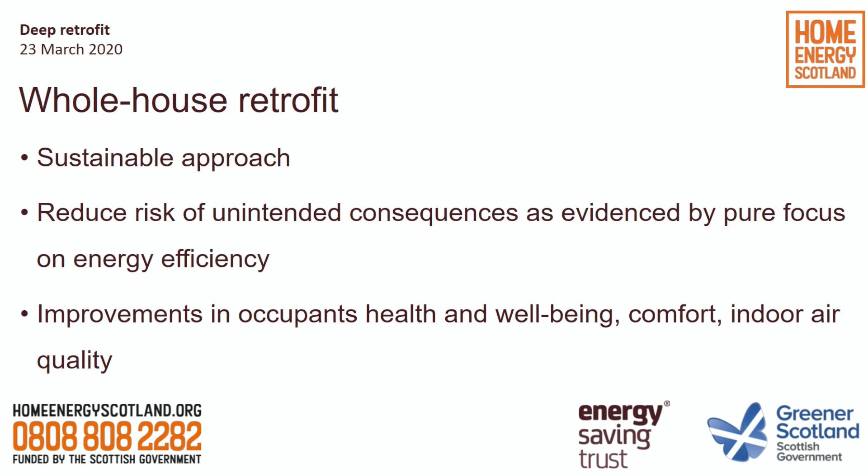...physics of that building - things like insulation, ventilation, indoor air quality, acoustics, lighting, all sorts of things come into play. It's about trying to think about as many of those things as possible when pulling together a plan for retrofitting your property, all whilst having that overarching aim of reducing energy demand.

It's an enormous feat, and in some properties it's more possible than in others, but this is a category of work that really needs to be considered, given the very ambitious target set by the Scottish Government of net zero by 2045.

They are currently preparing a whole house retrofit design guidance for Renfrewshire Council and their existing cross wall housing stock. That Renfrewshire Council project's been awarded funds from the Department of Business, Energy and Industrial Strategy, or BEIS, through their whole house retrofit competition. It's a fantastic project, delivering a Fabric First retrofit programme to, I think, 75 properties in 3 different areas located in and around Paisley.

Barbara will be talking about that cross wall properties project, their performance targets and compliance, and I think the aim is to refurbish them to EnerPHit standards.

If you're not aware what EnerPHit is, you might have heard of Passivhaus - really strict standards with very, very low energy demand. That's a standard that's been adjusted for retrofit projects and termed EnerPHit standards, because some of the qualities of Passivhaus would just be impossible in all retrofit designs, since you've got things you can't change or adjust to make it possible to achieve Passivhaus.

But by no means does that make EnerPHit easy to achieve. It's definitely one of the most stringent standards available for deep energy retrofits.

If I could quickly introduce our second speaker - following Barbara, I'll introduce Julio Bros-Williamson. He is a lecturer in architectural technology and building performance at Edinburgh Napier University School of Engineering and the Built Environment. He's an architect graduate from the School of Architecture at Marista University in Mexico City, and holds an MSc in Energy Efficient Building from Oxford Brookes University.

He's been a chartered Mexican architect since 2003, and he'll chat to us today about a particular research project he's been working on, slightly outside of his work at Edinburgh Napier. He's also a director at the Scottish Ecological Design Association, where most recently he's been contributing towards the research section of the association, and responding to government consultations and sourcing research funded projects.

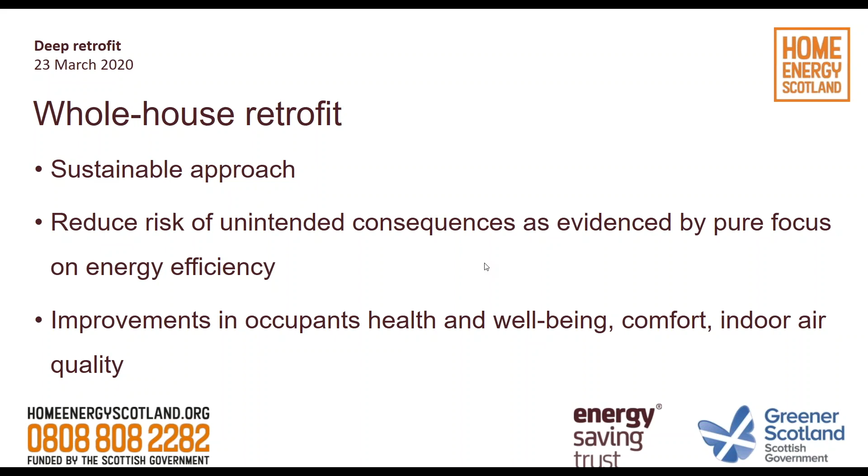I'm going to structure my presentation in 4 main sections. The first one gives you an introduction to what our office does and what HabLab means for the office. Secondly, I'm going to give you a general context of the retrofit industry, what we have been finding in our building performance evaluation consultancy projects. Thirdly, I'm going to briefly introduce you to the PAS 2035 standard. Many of you probably heard about it, but it's now a relevant standard for deep retrofit, and I'm briefly going to talk about it. And lastly, I'm going to go through the case study that Joanne just mentioned.

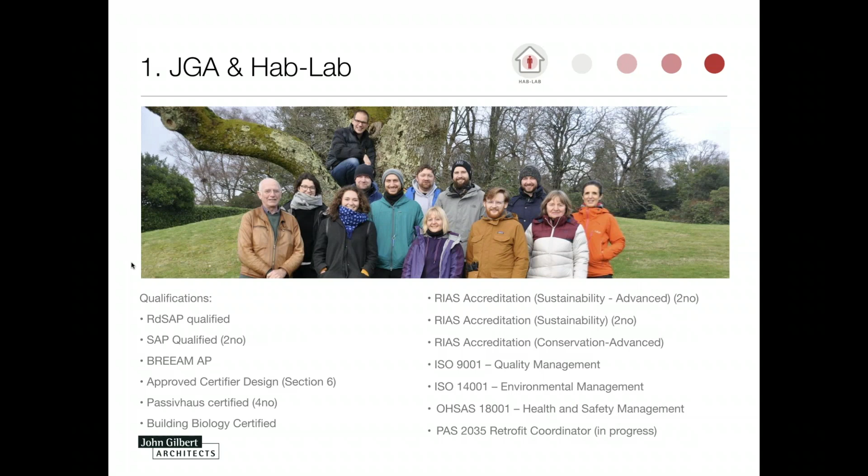So this is what we generally work on: the office works on 4 main fields. The first one is conservation, retrofit, strategy and master plans, and sustainable architecture. And the fourth one is HabLab, which is now 6 years old.

We have been focusing on the evaluation of buildings and how they really perform in practice and in use. It's a way we see as a new way of engaging with the industry, providing feedback loops not only to our office but to clients and the whole industry.

So what we do is we try to make building performance evaluation accessible to the industry, because building performance evaluation has been around for many years, but it has been more limited to universities, which is great. But what we try to do is just implement it and give it a commercial use, and offer it to our different clients.

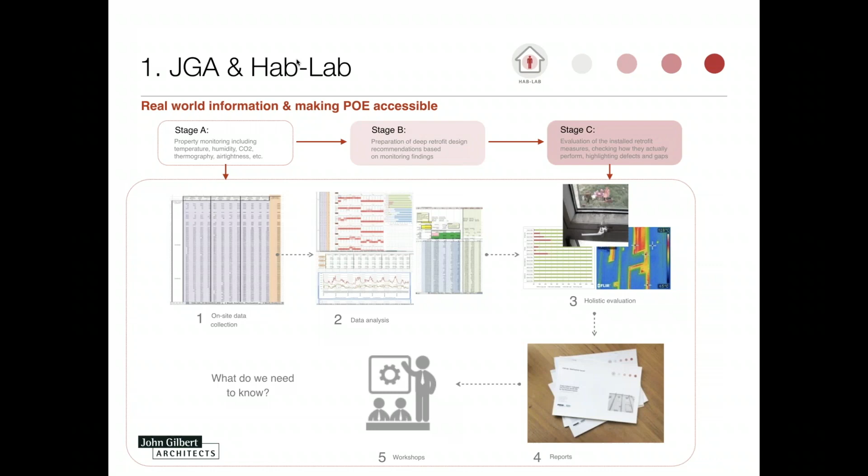On our second stage, we base retrofit recommendations on what we found on site and the tests and evaluations we conducted in the first stage. And in a third stage, after we install the retrofit recommendations, we evaluate them again to understand how well they performed and to identify defects, to improve the process for our next projects.

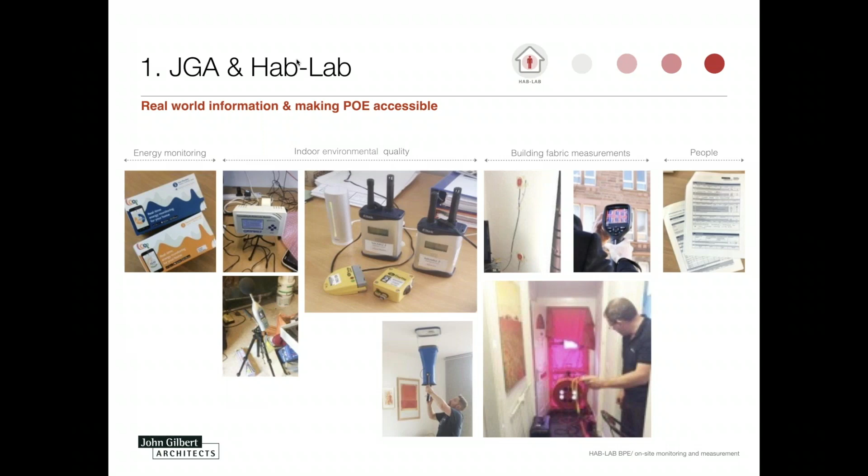So we have a good idea of how existing buildings perform and also how retrofit measures have been installed. Firstly, retrofit works generally reduce energy consumption, but not as much as predicted. This shows there is a huge unfulfilled potential, and there are many small things we will go through in the next slides to identify why this is happening.

Secondly, in terms of comfort and human health, houses are a bit warmer and more airtight due to the retrofit works, but this also exacerbates health risks associated with indoor air pollution and moisture. That happens mainly because retrofit projects are not designed holistically, and this problem can be avoided. These are problems generally related to condensation, mold growth, poor indoor air quality, and overheating.

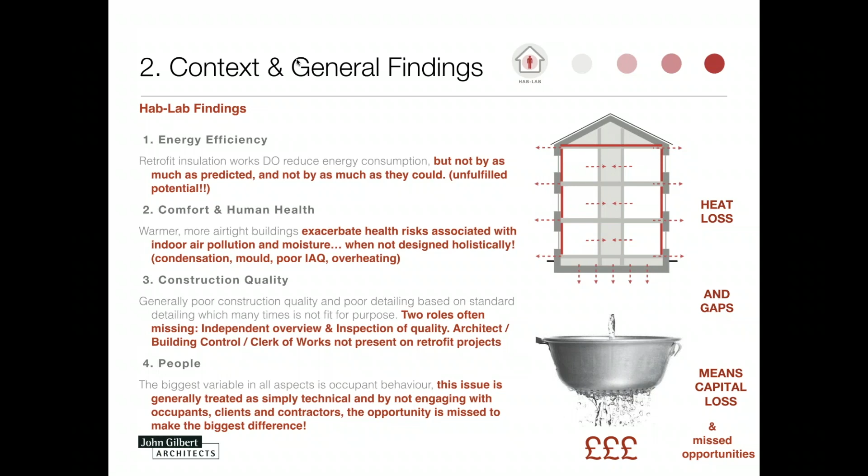In a fourth point, and this is a very important issue for us, we consider that people are the biggest variable in all aspects, and this variable is many times underestimated. This means retrofit works are focused many times on technical issues, and are not really linked to how people are going to use their homes or how they feel. This is for us a missed opportunity.

So all the issues that I mentioned before can be summarized as what is generally called the performance gap. This is mainly the gap between predicted and as-built performance. So all that has been specified in theory, all the calculations and how drawings have been prepared, are not actually happening on site.

Many studies have confirmed that this gap in the UK is quite big and is creating many new problems, introducing new issues. Previous studies, not only based on our findings but also on many other studies published in the UK, suggest and confirm that this performance gap is due to a lack of understanding of how existing buildings actually work.

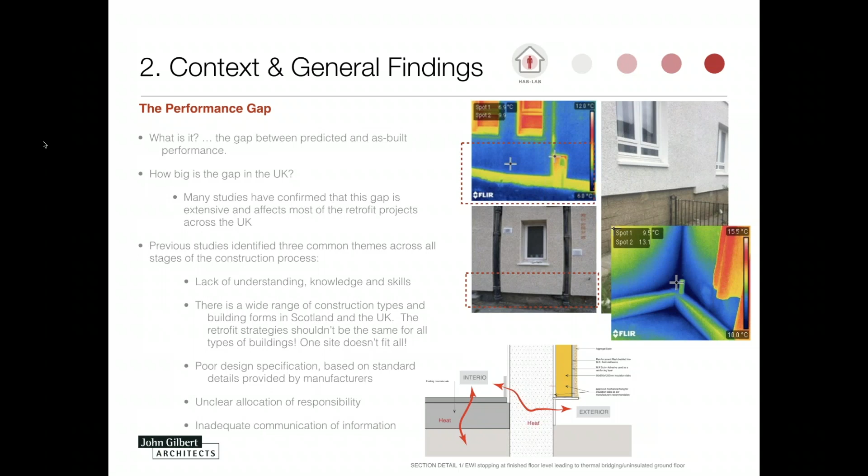So just to give you a general context, and this is also what Joanne was mentioning before, there are several targets that the government has been setting for housing associations and local authorities to meet. Some of them are more ambitious than others.

But the important thing is that this highlights the importance of trying to minimize the performance gap and trying to conduct retrofit as deep as possible. There are standards such as EESSH 1 and EESSH 2 that require social housing to meet EPC Band B by December 2032, which is for many of our clients an ambitious target.

And in the context of what are requirements for retrofit, up to now, beside building regulations, the only requirement was PAS 2030, which is linked to specific funding requirements. But there are not many retrofit standards for Scotland and the UK for our clients to follow. So that's one of the challenging parts.

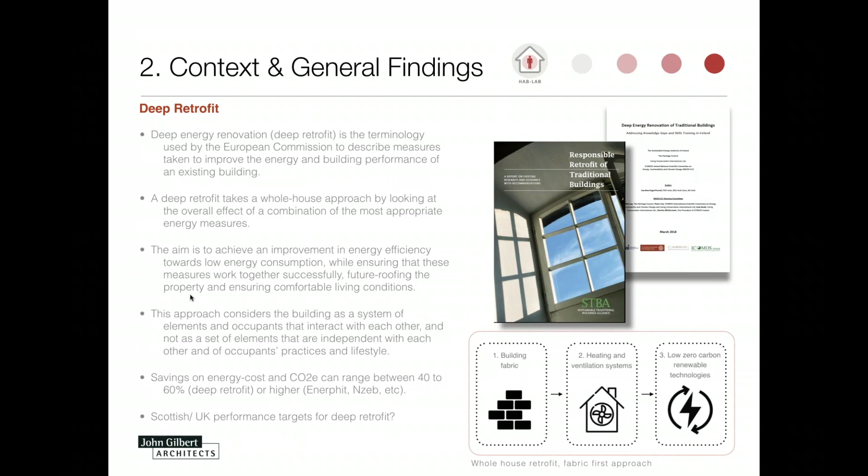As I was saying before, there are no clear or set performance targets for Scottish deep retrofit right now. There are international targets such as EnerPHit, the Passivhaus retrofit standard, and I'm going to talk about it later because that's the case study I'm going to describe in the following slides.

In that context, PAS 2035 provides a specification and best practice guidance for energy retrofit works for domestic buildings in the UK. It has been released by the British Standards Institution in July 2019, so it's relatively new.

Some funding schemes already require it for specific funding streams, for example ECO, but it's not a compulsory standard right now for most retrofit projects.

It provides a series of guidance on technical aspects and on the process in general, specifying the right retrofit measures in a holistic way, assessing the interaction between measures, and assessing ventilation, which many times isn't considered in retrofit works because it's generally only focused on energy efficiency aspects.

Assigning a project manager is compulsory if one wants to comply with PAS 2035, and that's the retrofit coordinator. It's the project manager of a retrofit project, ensuring appropriate qualifications and skills by providing training and qualifications.

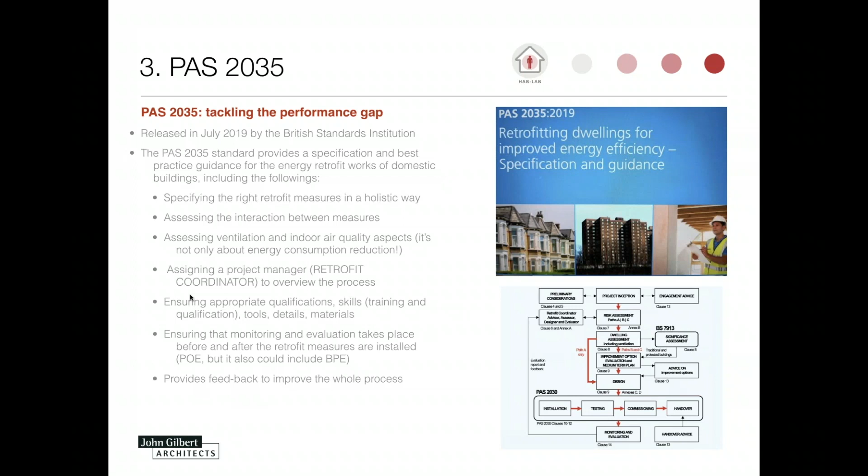Ensuring that monitoring and evaluation takes place before and after a retrofit project or retrofit measures are installed. All of this helps provide feedback to the industry and to the different clients and parts of the industry. So until now, only PAS 2030 was a requirement for funding streams.

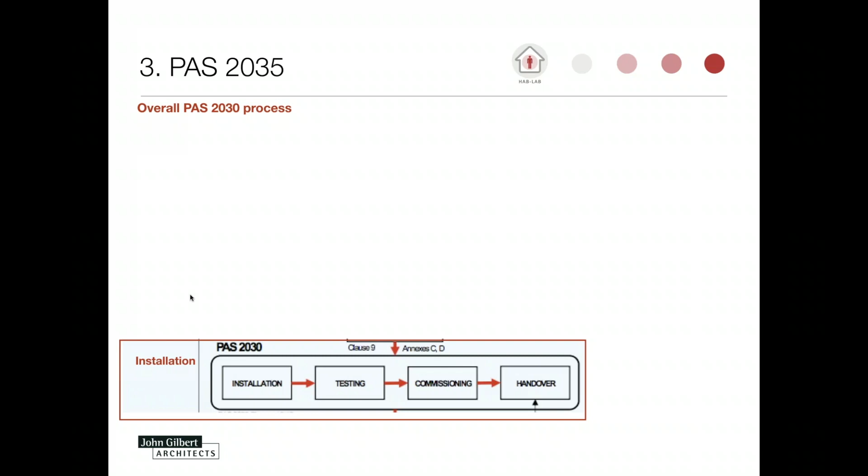PAS 2030, probably most of you are familiar with this, is a standard for the installation of retrofit measures. Until now, there wasn't really a general structure or suggestions of how the retrofit procedure had to take place.

Now with PAS 2035, it basically incorporates, it absorbs PAS 2030, but gives a longer, more general guidance on how a project has to be assessed in the first stages, and how the design has to be developed for different building types.

It advises the industry how to install it and how to monitor to make sure that the retrofit measures are installed in the right way. The whole process intends to minimize the performance gap that we were mentioning before.

So that's stage number 1, inception. Stage number 2, design, installation, and monitoring. So the standard basically covers those four stages of any retrofit project.

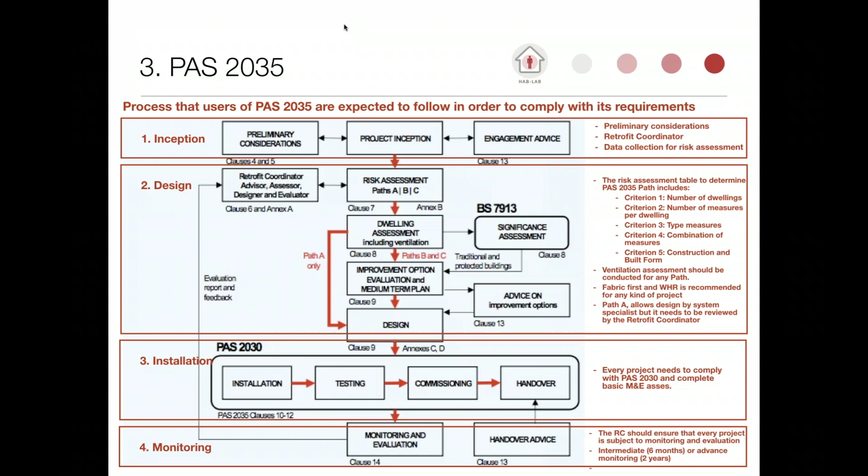That will give you a specific type of risk that will establish how risky the project is, and depending on how risky the project will be, it will define how many considerations the designer or the retrofit coordinator needs to take into account during the whole process, and how it will need to be monitored.

So I'm going to go through one of our case studies now. I will try to keep it as short as possible, just to keep time.

We are currently preparing best practice deep retrofit advice for Renfrewshire Council for most of their building stock. What you're seeing right now are some of the different building types we've been preparing retrofit recommendations for. One of them is crosswall houses or flats.

But there are other types such as traditional sandstone tenements, BISF houses, and Atholl steel, and so on. So one of them is the crosswall, and that's the case study that I'm going to go through right now.

So for this particular project, well, something I wanted to say before that, for all the projects, all of them are treated as deep retrofit projects, and for all of them we've implemented a 3-stage approach, where we evaluate them first, then prepare the retrofit recommendations, install them, and evaluate them after installation to make sure they work as we are expecting them to work.

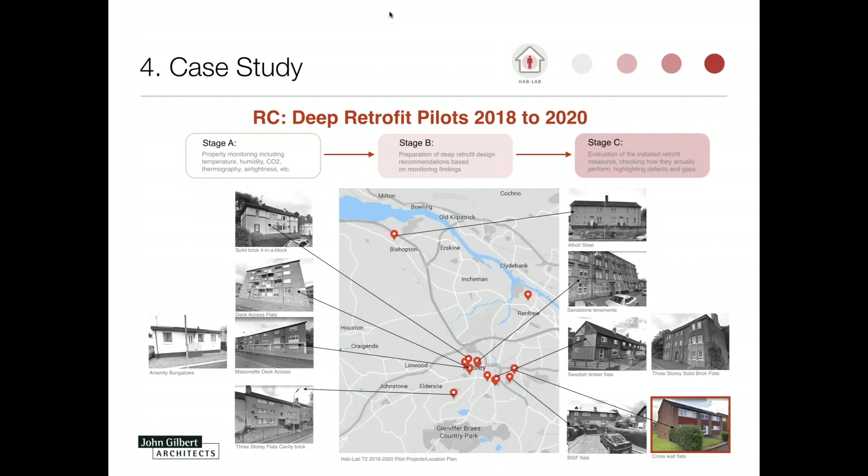For the cross walls, we actually used this project to enter a retrofit competition run by the Department of Business, Energy and Industrial Strategy, and we won. We've been awarded funding for 75 cross-wall houses located in Paisley. We've done this together with Renfrewshire Council, and our partners on this are also BRE, CSIC, and the Passivhaus Trust.

So the property types, if you probably know this kind of house, are from the 1960s. The energy reduction target for the deep retrofit project is 25 kilowatt hours per square meter per year, which, for those familiar with those numbers, is a very low energy consumption.

The general retrofit strategy is fabric first. That means we are treating first the fabric and all the components that form it, that is walls, insulating walls, roof, ground floors, windows and doors. And then after that has been improved, we follow the process by improving the building systems such as heating, ventilation and renewables.

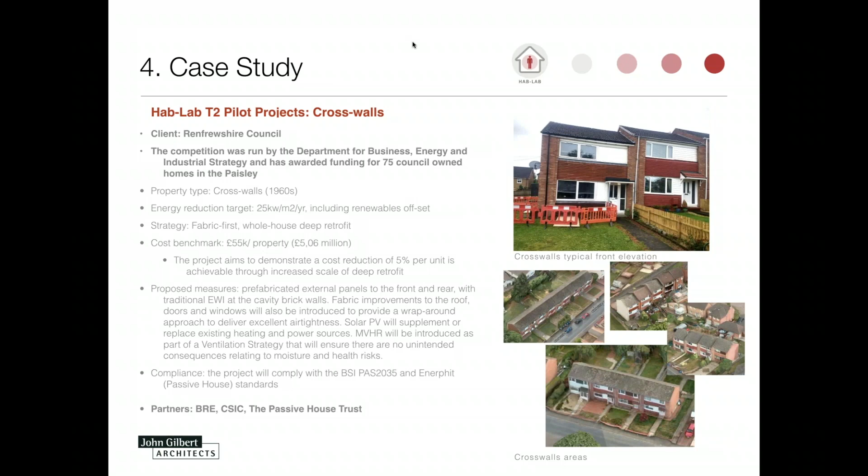This project intends to comply with PAS 2035 and intends to be a case study to implement this standard, and it also intends to comply with EnerPHit, which is the Passivhaus standard for retrofit projects. This standard looks to insulate and improve air tightness levels to very, very high standards to be able to reduce energy consumption as low as possible and not have to rely on building systems.

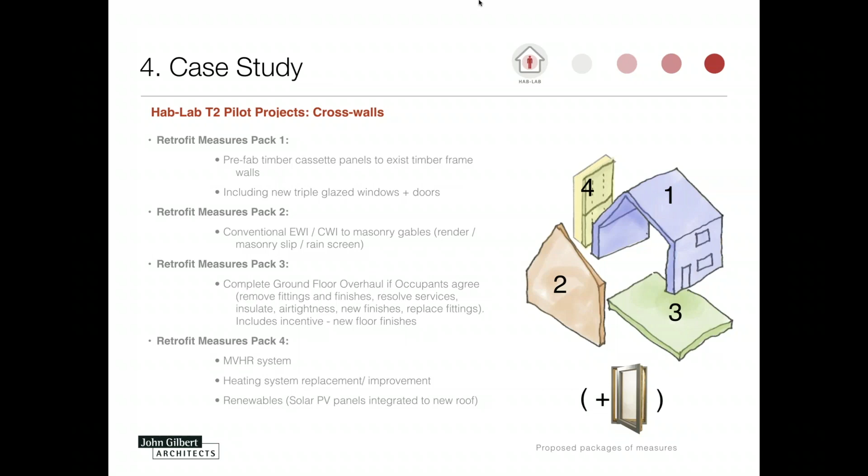So this slide basically summarizes what I was talking about before, and shows that based on what we've evaluated on site, we selected 4 packages of measures to adapt the design solutions as much as possible, or to base the retrofit design solutions as much as possible on the existing conditions of the property.

In terms of PAS 2035, the assessment I mentioned before confirmed that the project is a design path C risk, which requires more stringent design consideration than other types of projects, so more checks, more information provided by the retrofit designer, and so on.

The retrofit coordinator and designer is John Gilbert Architects. I'm the retrofit coordinator for the project, and the retrofit designer is one of the architects from our office. The retrofit evaluator, who will do the pre and post evaluation, is BRE, and there is also an assigned retrofit advisor, the WISE group and Renfrewshire Council, who follow up the consultation with residents and occupancy service and so on.

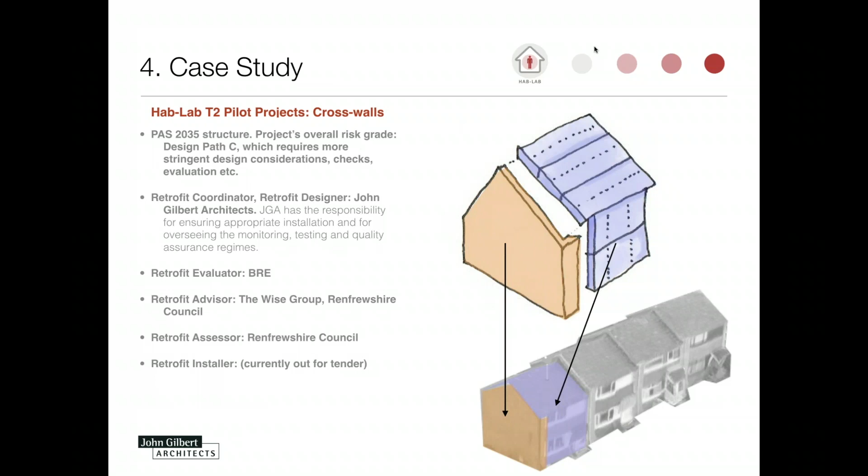So our anticipated outcome is that the proposed measures will improve the EPC from 54 to 91, which is really a huge improvement, and it will future-proof the properties to meet EESSH not only 1 but EESSH 2, meeting the targets for 2032. The existing primary energy consumption of 313 kilowatt hours per year per square meter will be reduced to 25 kilowatt hours per year per square meter, a 92% reduction.

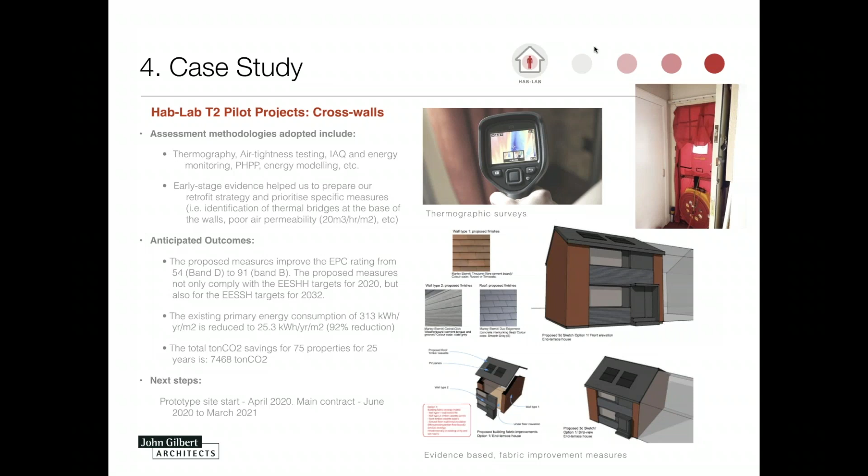We will start on site, hopefully, depending on the circumstances. It will start with a prototype on site in April 2020 to test what's possible and what's not. We're going to test this on a void property and start with the main contract of the remaining 74 properties in June 2020.

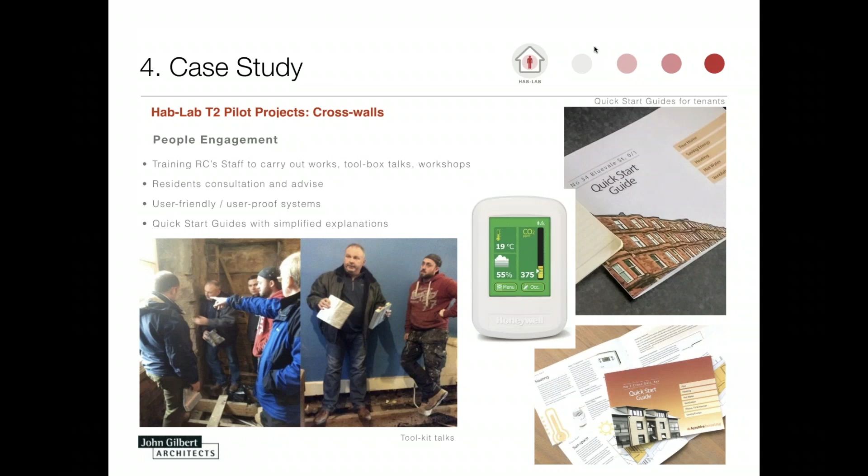And there is a whole series of a people engagement program that we are conducting with the council to make sure that this will actually happen, to minimize the performance gap and make sure that our specifications are actually going to be installed as expected. This will be by carrying out toolbox talks, workshops, asking the residents what current issues are and what current comfort levels are. We will also provide and prepare quick start guides to explain to the residents how to use the new systems. And I think that's all.

I hope I didn't talk too much. You can see in the last slide my contact details. I'm happy to get any questions, or if you have any specific question or query, please do contact me. I'm also providing the link to where to download the sustainable renovation guide that the office and the Public Trust has prepared, along with SEDA and Historic Scotland. So that's me.

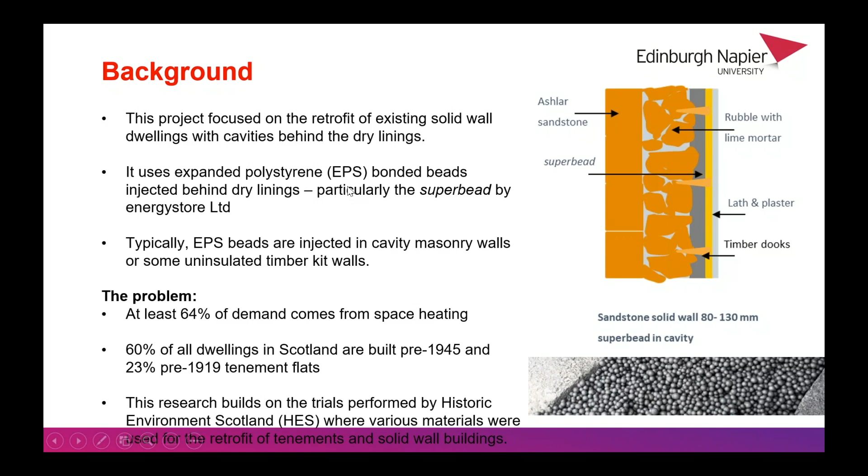But sadly those trials were limited. They were small in quantity, and really we did get some good response and good results from them, but we're only talking about 1 or 2 examples. So this project really builds on that.

A lot of the results and studies have been explained in the technical details and documentation that we produced together with Historic Environment Scotland on the results, the techniques, and the benefits these products bring to occupants and to the building. So really, I would encourage a lot of people attending today to download these and access them and get an understanding of how they're very useful for similar properties.

So back to this project in terms of what we covered: we looked at expanding and creating a larger body of evidence on the use of these beads. To achieve that, we were able to work with energystore to provide the beads, but also a series of installers, principally Everwarm, who were great for taking the product and dealing with some of the other stakeholders, primarily the housing associations we worked with. In Paisley, we worked with Williamsburgh Housing Association - they provided 3 tenement solid sandstone buildings.

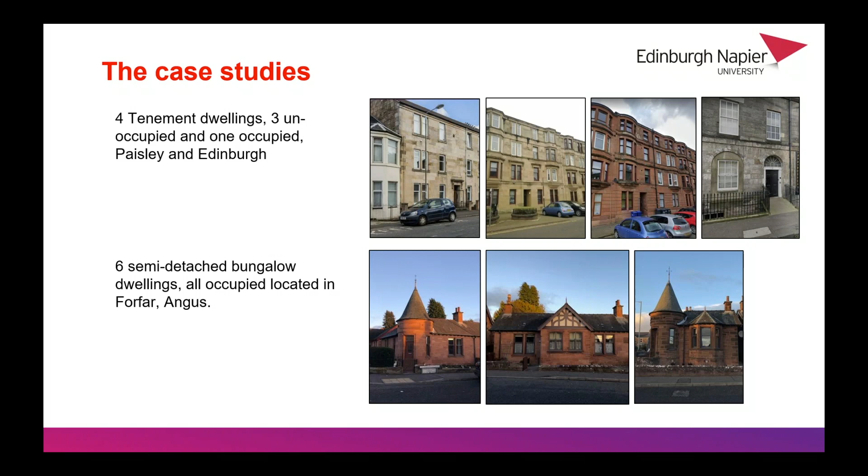The common aspect within all these 10 properties was that they were performing badly - residents were uncomfortable and spending a lot of money heating these properties. The tenement buildings - 3 of them were unoccupied and underwent a great deal of intervention in terms of retrofit. One was occupied, the one in Edinburgh, and the 6 in Forfar were all occupied, so it was really dealing with the social aspect and the availability and access to these properties.

In terms of the results and testing we underwent, what we prioritize in these projects is performing pre and post intervention testing. It's really important, just like Barbara was explaining, to understand the baseline - how the properties are operating to begin with - to use that as our figure to improve against, and then for any interventions to understand their extent and the post-testing and monitoring, to really get an appreciation of the improvement if possible.

So we used 3 different tests. We used air tightness, air permeability testing with blower door tests in each property. We also used in-situ U-value testing, where we installed heat flow mats for a period of 15 days at pre and post intervention, to understand a more dynamic U-value and how much heat was escaping through the envelope of the properties. Essentially, we're trying to measure the impact of before and after of these beads inside the cavity.

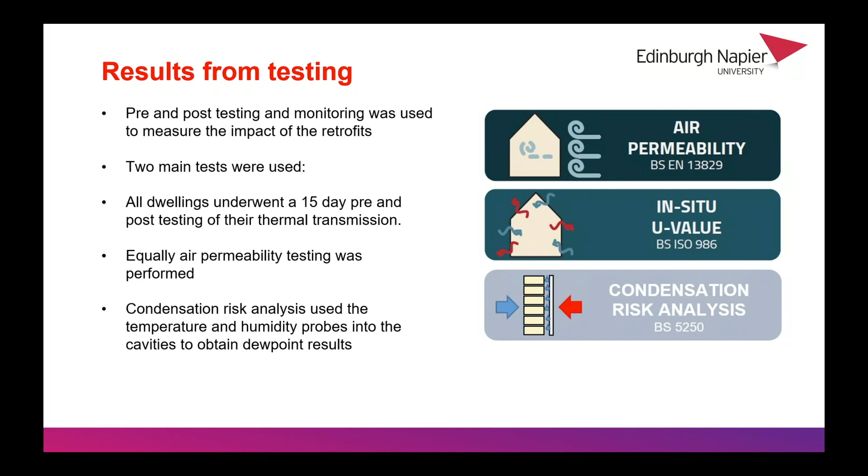This is part of a lot of the Historic Environment Scotland testing we did before. Again, this was limited - a very small number of cases. Here we wanted to understand similarly how this performed. We were able to put condensation, temperature and humidity probes into the cavities, to understand over a period of pre and post how that performed.

So on to some of the results - just want to cover these quickly. The U-value results were really good. At pre-intervention, we had results ranging roughly between 1 and 1.4 watts per meter squared Kelvin. If we compare this with new build standards, it's much higher than you would expect in a new build - new builds are around 0.18 to 0.20 watts per meter squared Kelvin. Obviously existing buildings have other thermal properties of the materials.

In this case, U-values range between 1 and 1.4, which is quite high. Once we were able to inject these beads into the property, into the cavities, we were able to get a reduction down to 0.45, ranging towards 0.6. Overall, within the 10 monitored properties, that was a 63% reduction. This is a mean average reduction across all 10 properties, which is quite impressive.

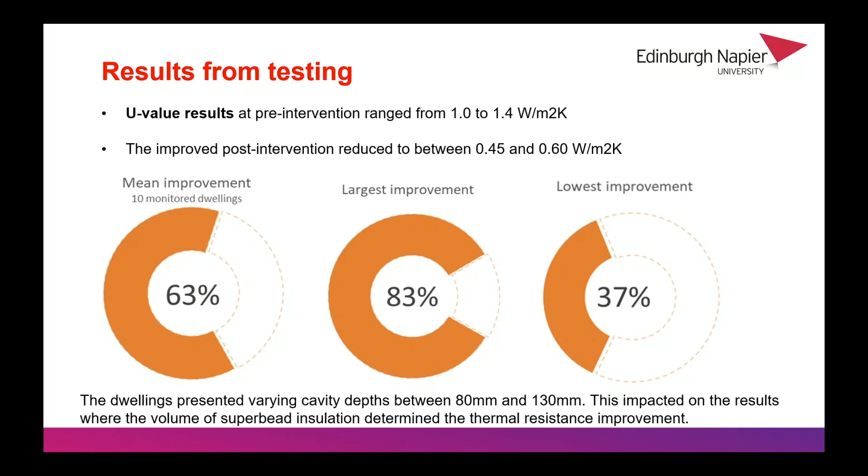That has an impact on the thermal response of any intervention, in this case the beads, where you'd have thinner and fewer beads at one end and more on the other. But we did find that the deeper properties, the deeper the cavity, had the largest improvement compared with those closer to 80 millimeters. That was really interesting to look into through the cavity analysis and our surveys of the properties.

In terms of air leakage, it brought us some difficulties, and some of the results that came out of it were really interesting. Again, we did testing pre-intervention to get a baseline, and then post-intervention, and we were able to acquire some reductions, primarily in the tenements. In the buildings we tested in Paisley, we measured a pre-intervention figure of 15 meters cubed, and after the interventions were installed and retested, we were able to reduce that by 3 meters cubed, down to 13.

Now, that might seem like a very low reduction, but if we look at the grander scope of the building and the type of interventions done—just looking at the walls in this case, and the general improvement of the finishes of the build of that flat—it's a considerable reduction.

Unfortunately, in the testing we did in the Forfar properties, your 6 semi-detached dwellings, we observed a very low reduction in air permeability. The reason for this was that the beads were only installed in one of the walls, which meant the retrofit wasn't, as we're talking about today, a deep retrofit—it only looked at one of the walls. Hence why the reduction was very small.

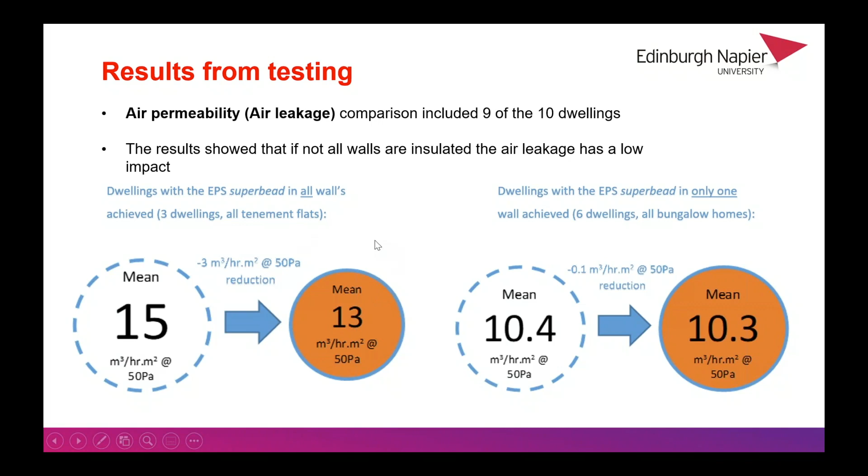If these properties were to go through some of the retrofit that was done in the tenements, I'm sure that reduction would be much greater. We got air permeability of around 10, down to 10.4, down to 10.3, so really minimal in that sense. But nevertheless, we've seen that in the tenements this reduction is really good.

So in terms of the impact and benefits, to really wrap up the work we did, it's important to emphasize that this intervention is very easy to undergo. One of the benefits is really the speed of install. Once the survey's been done, a series of holes are placed at different heights within the wall, between studs, between noggins, etc., to be able to fully fill that cavity behind.

It's not as obtrusive as other kinds of interventions like internal wall insulation, where you've really got to create a new frame around an insulation layer.

Once the bead is inside and the holes have been filled, it's really just replastering and filling in those gaps. It's quite cost effective compared with internal wall insulation, and it's certainly very interesting in the way it can achieve much lower and contribute to lower energy performance certificates.

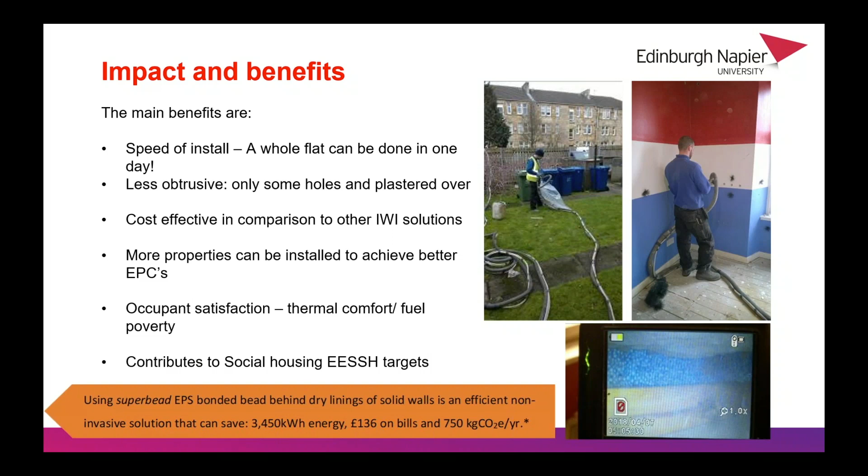So that's a bit about this case study and how the beads have been great to achieve these benefits to the occupants, to achieve lower energy and contribute to lower energy bills and environment. I hope it can be used for new trials and to expand the work.

Something we haven't finalised was the condensation risk analysis. We weren't able to do testing for a longer period, which is really useful. We tend to use dew point temperature as our indicator of any humidity building up in these cavities, and that's something we hope to expand with Energystore, to go through some trials for longer periods of testing to understand different seasons and how humidity can build up, if any. I'm confident through these early tests that won't be the case.

Thank you very much for the opportunity, and please keep in touch for the final report, which will be disseminated soon through the Construction Scotland Innovation Centre. My details are there if anyone has any questions, but I can also answer some now. Thank you very much.